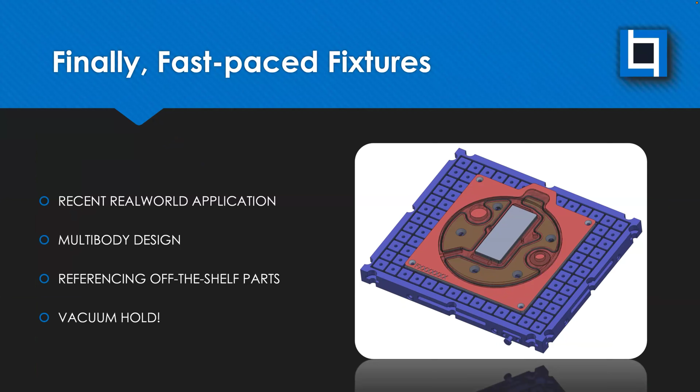So let me pull this up, and I think, oh, hold on. I actually have to change how this is. Oh, you know what? I think I know what I have to do. I think I have to exit. Yeah, there we go. So this is going to be mostly kind of a live demo. And we'll circle back to presentations.

So this is the actual vacuum fixture we use. There's a few different companies that make vacuum fixtures. I think we're using the Mitee-Bite brand. These orange things here are the actual vacuum ports. So basically, you have some air lines hooked up to this. You vise this into your machine, this or multiples, so you can actually daisy chain them to get different setups and stuff. I believe, if I remember correctly, it's like 18 inch.

I actually don't remember. Let's see, 15 inch. Sorry, that's a 15-inch square basically. So you fit a lot of different stuff on it, and you can set up multiple bays. I think we could fit two, for example, on our VF4 if we want to have different setups. But basically, the goal is to take this and then do some custom fixturing with it.

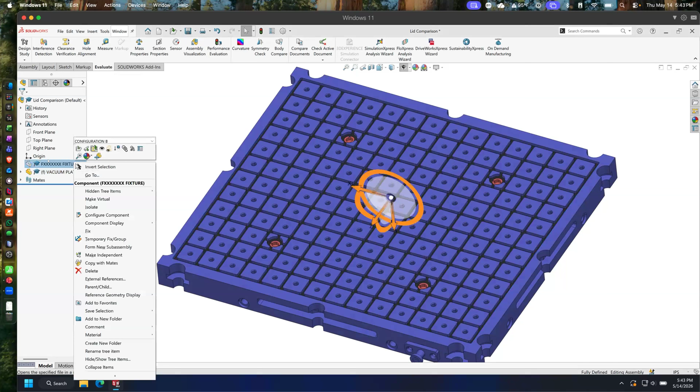So in this case, let me pull up the parts. Actually, that's the wrong thing. Let me show you the right thing. So what we were doing in this case, sorry, I saved it last in the wrong positions.

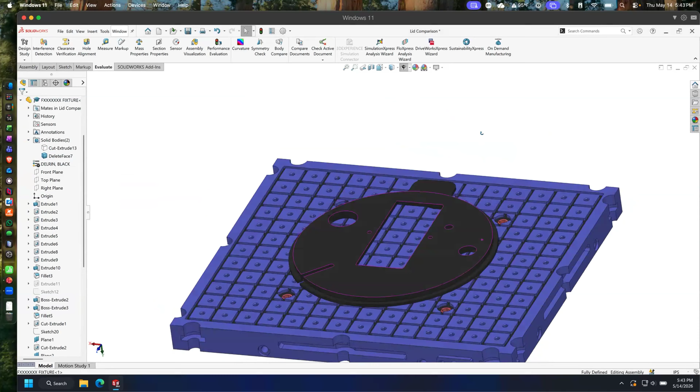But anyway, basically we had a custom part to make that after the first set of features, we didn't really have a great way to hold it traditionally on a vise or anything, right? But this geometry, we could machine a custom hold. We also have fixture plates that we could set up, kind of not unlike the vacuum plate, but they have a bunch of bolt holes, and we could just try to put in different screws, and basically we can set up different ways of machining it.

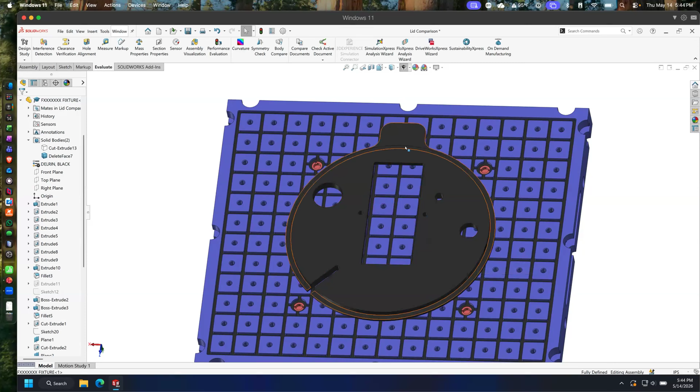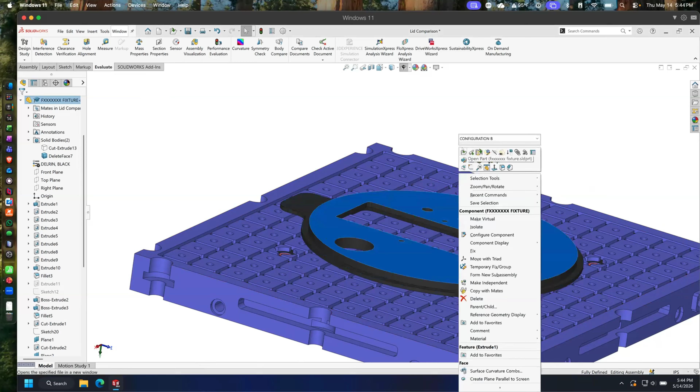The main feature for reference, I should mention. Oops, geez, mouse. The main feature we're machining really is we're just adding this lip here, and there is a carrier plate. So I don't actually have that represented, but basically when this was machined in the first op, just look at the part real quick. We machined this face, all the features on this face, and then left a small skin basically to it. So it's still got like a frame on it. We profiled it a little bit, but then, I'm trying to remember actually.

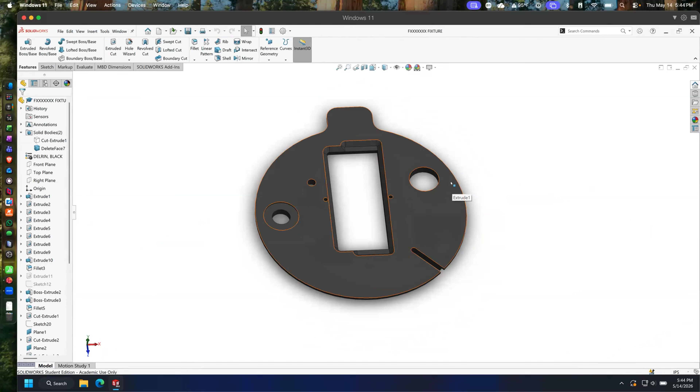Yeah, and then the final bit gets cut off basically during this op when we cut off the lip. So it mostly gets profiled and done, but then there's a little bit of a carrier skin on it. And then that's going to get cut off, and this profile on the lip is going to get machined away.

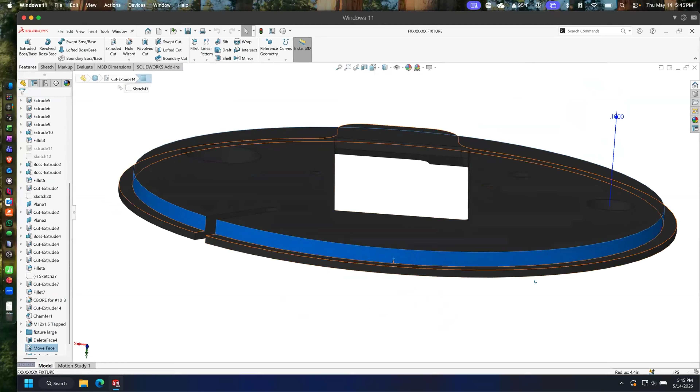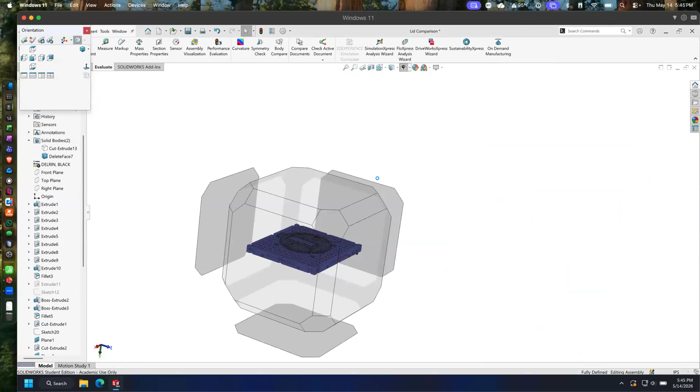So anyway, a couple different ways we could do it, but what we found really useful and quick is a nice vacuum hold. So for doing that, we actually just save this out as the machine file specifically. So we break it out from the design file, and we just build a vacuum fixture on top of the model. Let me give a better angle here.

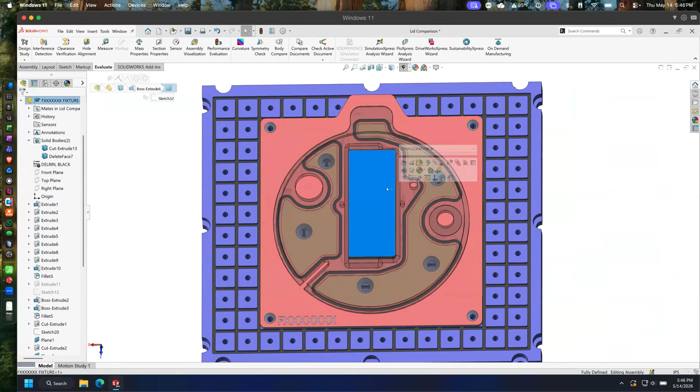And so we do a couple things. One of the things we want to do is obviously make it easy to fixture the part, so make the changeover when we're swapping parts very quick. So we want the part to be datumed accurately. So for example, in this case, this part is essentially located by this center feature.

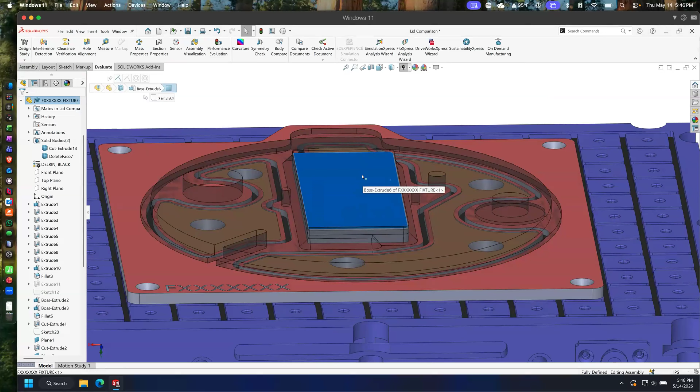That center feature is already cut. We're not doing anything else to this middle. So we're just dropping it down on that feature. It's a snug fit, so it's located well. We don't have to hit the datum on every single part. We know the part's right where we're expecting and located the way we're expecting it to be.

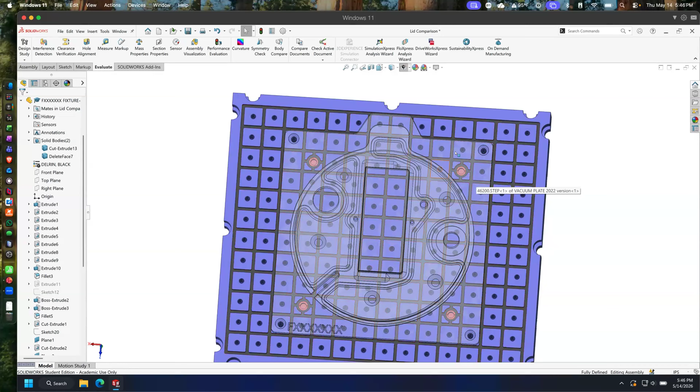And so yeah, we want to locate it, and we want to obviously securely hold it. And so this is like an adapter vacuum plate. So the vacuum, as I said, is pulling up through these 4 vacuum ports. So what essentially we're doing is transferring the vacuum from those ports to our ports, quote unquote, that are on the vacuum fixture, which are these holes here. So these 5 holes are actually what's going to pull vacuum on our part, and we're passing that through.

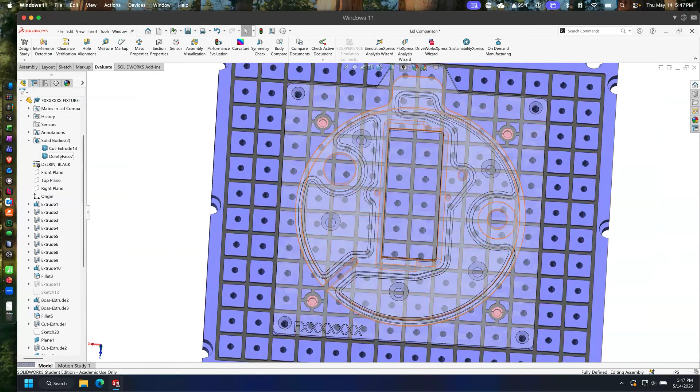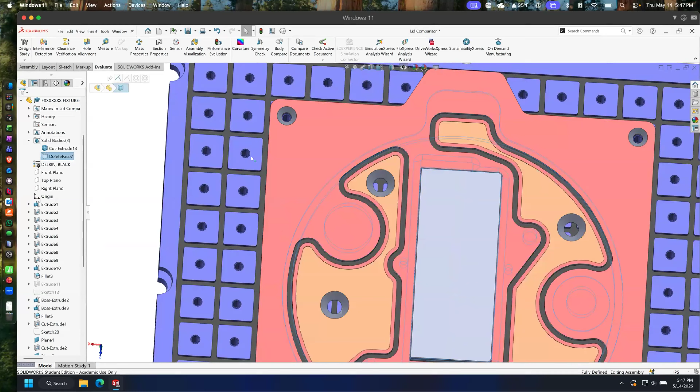So we use a gasket down here on this part around the vacuum channels that's holding our fixture. And then the fixture is also bolted in just to locate it and make sure it's in a good spot. And then the fixture is essentially then pulling vacuum through this. Maybe I'll just hide this part for a second so I can better show this. So these vacuum channels, we have to make sure these holes line up with the vacuum channels, because that's where the actual vacuum is being pulled through.

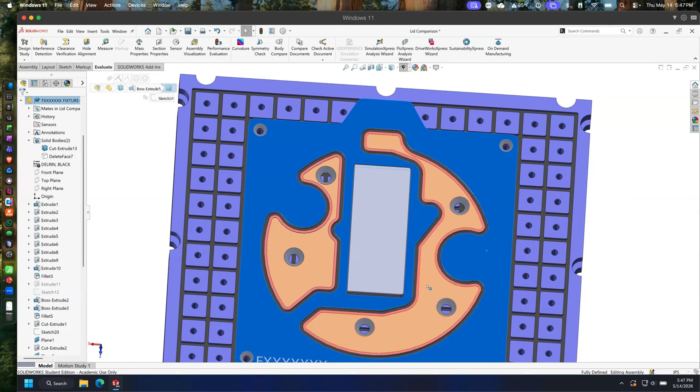And then aside from that, you just want to make sure your holes are within this vacuum area. So this is the area that's holding vacuum versus the red is the area not holding vacuum. So this is basically one big vacuum face, and we basically want to hold the part as close to the edges as possible, within reason, just to reduce any lift or potential problems as it's cutting. The vacuum fixture is holding it down, and then this feature is really holding it from translating. So you get a pretty good hold.

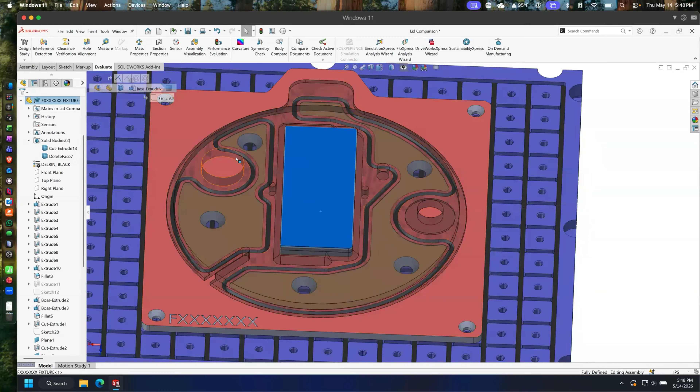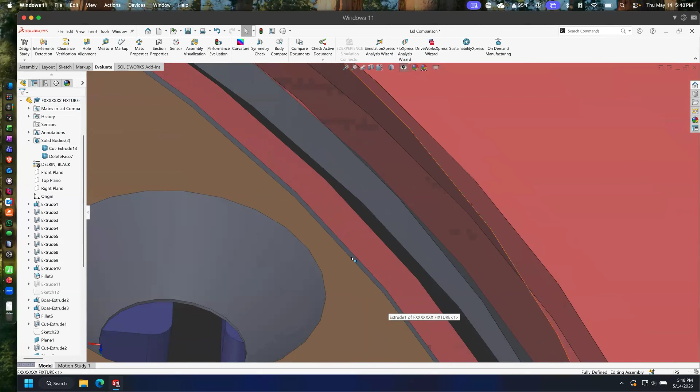And then we just avoid features like these holes that would otherwise break vacuum, right? That's why we kind of vacuum channel around this. So we just add our own O-rings to those areas as well. It's just O-ring stock for the vacuum in that specific size, and we just go around the holes we need. Pull vacuum through there. We have a small step, you'll notice, and that's because you want it to pull vacuum in that middle face, like I was saying, right?

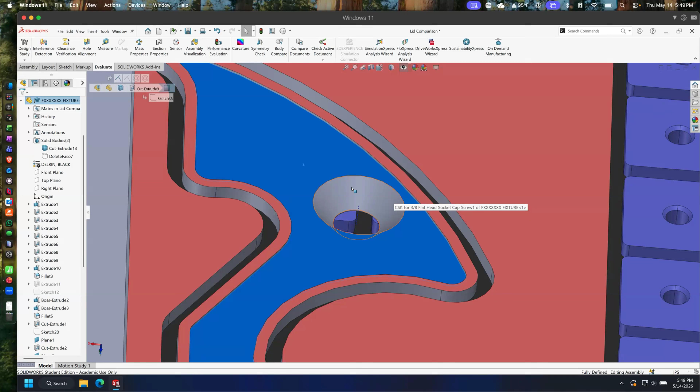But if you don't leave a small step, if this was all just one flat area, your part can actually kind of block the vacuum. So you're not really getting a hold across a big section. You're really only getting a hold where that hole is, versus we're getting a hold across a big area because the part isn't sucking down past this lip. It's sucking down up to the lip, and then this whole area is sort of vacuum, if that makes sense. Which seems to give us a really nice hold.

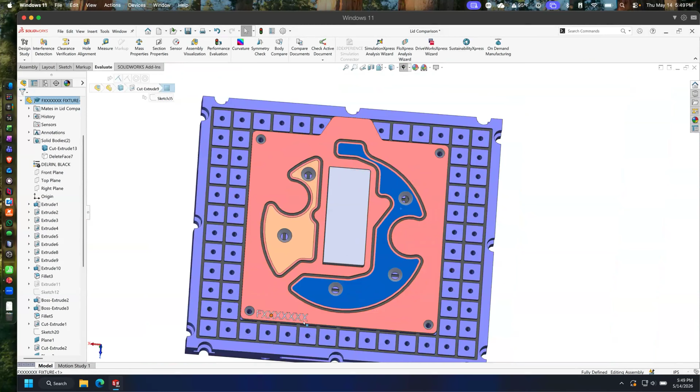Yeah, and then that's basically bolted together. We add a label, and I just realized I don't think I explicitly mentioned it, but this was all in the effort of also using 3D printing. So we decided this is something we could machine. We talked about machining something similar, but some of the geometry and some of the things we've done we wouldn't necessarily do if we were machining, but we decided to test out this concept for just doing 3D printed fixtures, and have found really good results.

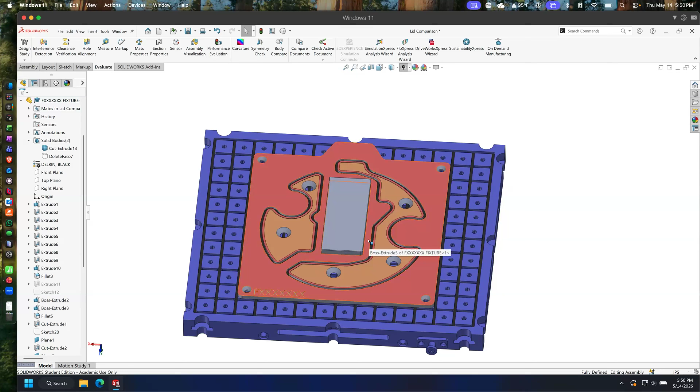So as long as we go thick enough on our walls and our bottom and ceiling, basically, we get a good vacuum hold. We don't get a lot of air leak or anything. We have very little issue. You just have to make sure it actually prints flat and everything. You want a good quality printer, and then use a good quality material.

So we do sometimes need to run these with coolant, so you want to use a material that'll hold up to that long term, for example. So in this case, we usually have been printing out a PETG. That works fine for coolant, at least long term enough for us. Certainly it could break down over years or something, but these fixtures don't have to last that long typically for us. We're only doing things for maybe a few weeks. We just don't want it to break down quickly.

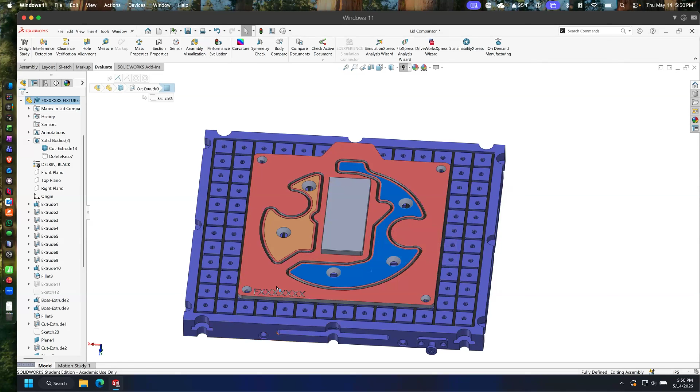Yeah, and then we're able to add in fixturing, label it easily, print it. We usually are able to just print these overnight, maybe 8 hours or something with all the extra layers and stuff. This is about a 12 by 12 sheet for reference. And then we have vacuum fixtures and start cutting away in the morning. That's kind of the overview.

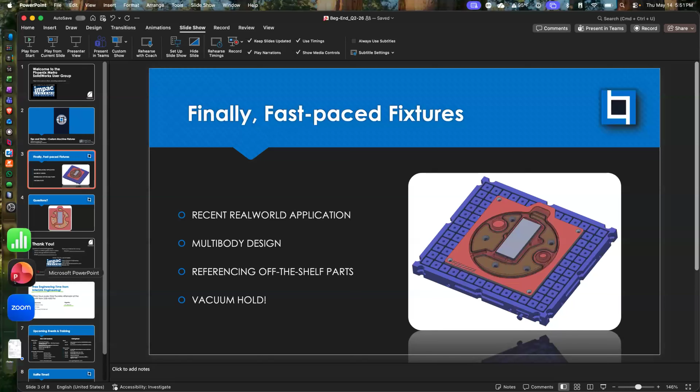Let me go. I forget if there were other features I wanted to try. I think that was it. Let me go back to officially ask you.

Any questions? Yeah. Do these vacuum plate systems require a fairly sizable accumulator? That's a great question. Yeah. So our air system was struggling at some point. We didn't find that we specifically needed an accumulator, but it will go through a fair bit of air because you do get a constant airflow. It's not like it sucks vacuum and then stops.

But what we ultimately found was the best solution is Mitee-Bite happens to sell a vacuum pump with theirs that is continuous running, so you can run it 24 hours. Okay. And that really seemed to be the best solution because we were running just air throughput. If you were just cutting occasionally, I think that's a totally fine option. But sometimes we might run, in fact, I think we were running a part where the program was 8 hours or something. Our air compressor would have just been running nonstop to keep up with the vacuum.

Any other questions? So how much airflow was your system actually trying to use? Was it trying to draw down to need a ton of pressure, or does it just need a ton of volume? That's a good question. It does need a ton of volume. That's a really good question. I don't have the answers offhand. I should have thought to check that.

I know we're getting 12 PSI on our pressure gauge, or I think it really ends up being closer to 13 PSI, across the surface area. I don't know offhand what this one is, but let's measure it. So we're getting 21, 22 inches. What's that math? Times 12, 240 or something pounds of pressure across that surface area.

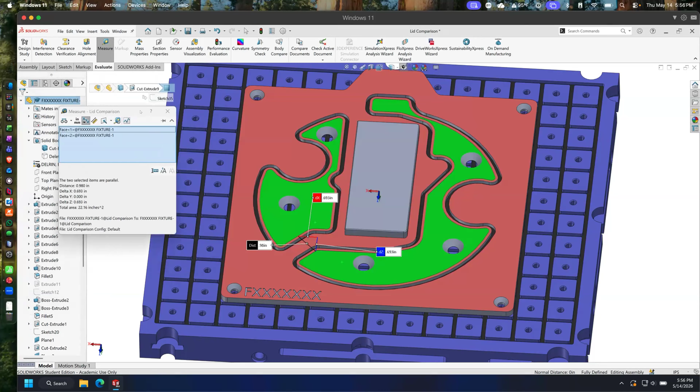Actually, probably a little more. Should know the math offhand better. 286 pounds of hold, so a pretty good amount of force down. In this case, also, we're just cutting Delrin, so we're not putting that much force into it.

So the top, yeah, that's a good question. For the top features, we were using the vacuum, but we weren't using the fixture. The top features were done when it was still just a flat piece of plate, just 3/8 stock, a 12-inch square.

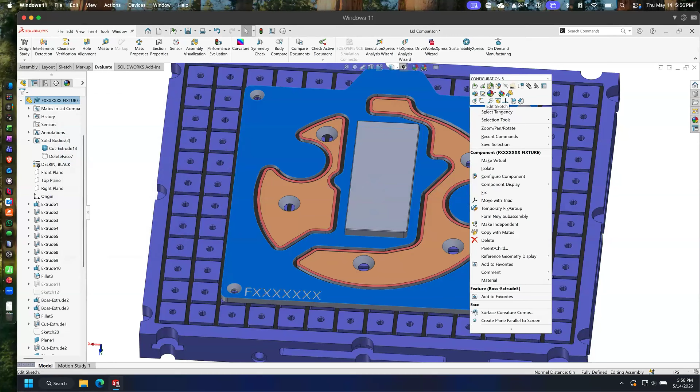Unfortunately, I don't have any half done ones to show you guys, otherwise I could pull out a sheet. But we use the vacuum fixture as well, just holding a big square flat sheet. So in that case, we have 144 square inches of area across the whole sheet.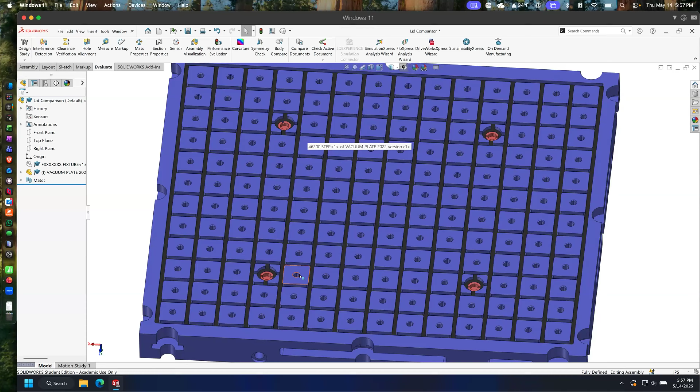Are you just counting on your Z offset being good enough that you're getting all the way through your part without cutting into your fixture, or are you doing some kind of spacer under the part? No, we're not using a spacer. Cody could definitely speak better to it, but we know we're cutting short by like 50 thou, because then we leave a little skin carrier on it so that we never go all the way to the plate. We expect that we're going to cut off a skin basically.

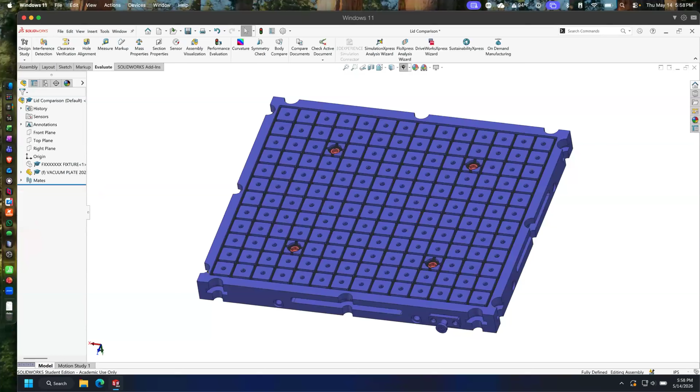Any other questions? From Mitee-Bite, did they give you any guidelines for radiuses on the O-rings? That's a fair question. No, really no. Their own thing is pretty tight. Obviously, you're running the O-ring in here, so we try to go no smaller than about a 1/4 inch when we're running the O-ring, give or take.

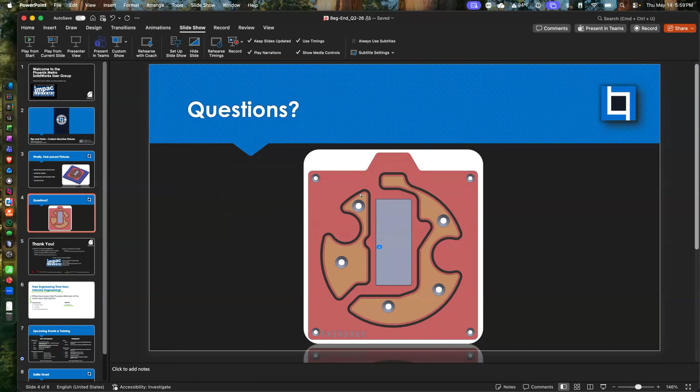If you have one tight turn, it's not going to kill you, but you definitely want to not go too tight, because it'll raise at the corner. So you can see here, we try to do fairly large sweeps, so we don't have any super aggressive turns. I think everything's at least around a 1/4 inch.